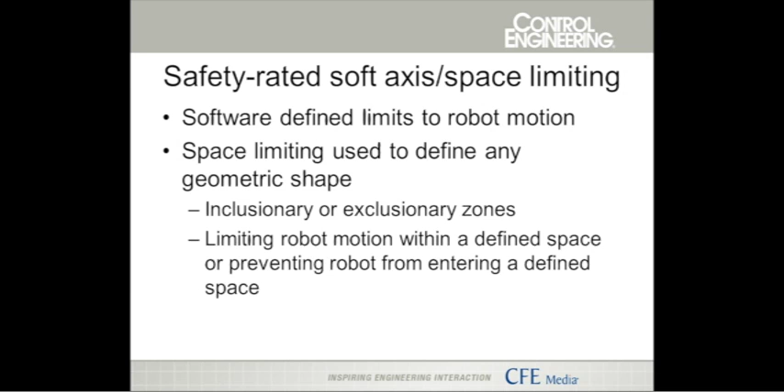Each of our major manufacturers have a different name for this particular feature. You have to ask if your robot is equipped with this feature of safety-rated soft axis and space limiting.

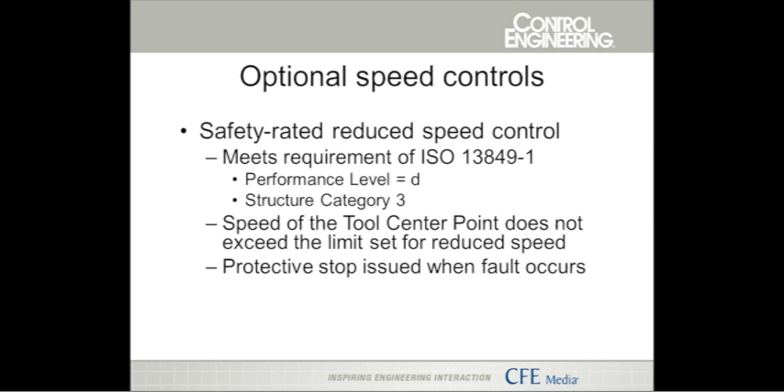The other enabling technologies are optional speed controls, where they are safety-rated. Specifically, use safety-rated reduced speed control. The safety rating meets the requirement of ISO standard 13849-1, specifically meeting a performance level equal to D and a structure category equal to 3. The speed of the tool center point, commonly called the TCP, does not exceed the limit set for reduced speed, and a protective stop is issued if a fault occurs.

We also have optional speed controls where we have a safety-rated monitored speed, again providing monitoring meeting a performance level D, structure category 3. The speed of the tool center point or of an individual axis shall be monitored, and a protective stop issued if the selected speed is exceeded. And then we have safety-rated monitored stop, which is essentially a speed equal to 0. The robot is monitored and will not move in this stop position.

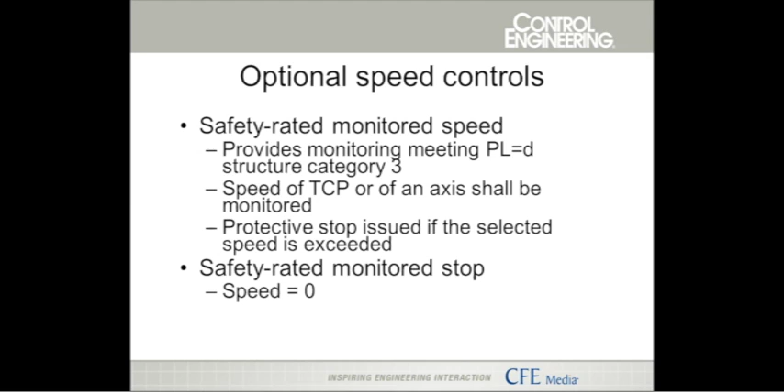We have identified several collaborative robot applications or methods of performing the application. The robot system exhibits certain control performance in safety-rated monitored stop or hand guiding. These features are very similar to traditional applications, only now we allow the human to work directly with the robot.

The safety requirements for these methods are well understood, and we are comfortable with the guidance provided for them. Two newer methods have been identified: speed and separation monitoring, and power and force limiting by design or control. Neither of these is well understood. Speed and separation monitoring - well, we can do speed control, that's more or less a no-brainer. But the separation monitor, determining whether you're keeping separation from a human or from a moving machine like a forklift, we don't have that sensing capability. The least understood of these is power and force limiting, either by design or control.

We are introducing a new ISO technical specification, 15066, which will provide additional information for collaborative applications.

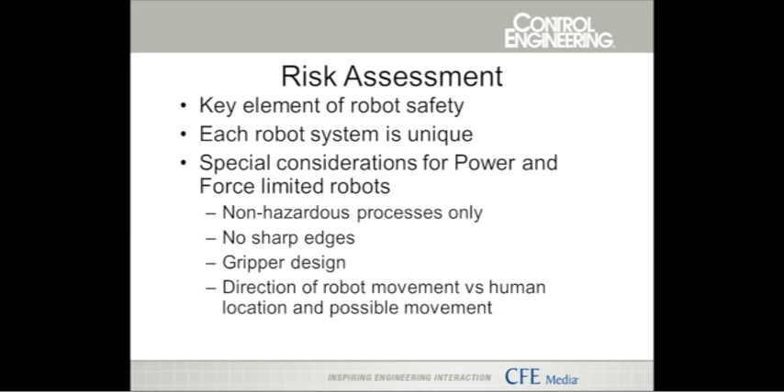Your comprehensive risk assessment has to be a task-based risk assessment. You need to look carefully at your layout design, the limits of the robot system, hazard identification, task identification, and hazard elimination and risk reduction. All of these are important features when looking at risk assessment.

There are a variety of task and hazard methodologies out there. The RIA has introduced a new technical report, TR R15.306, which presents a known task-based risk assessment methodology suitable for robotics. It's revised but similar to the method offered in the 1999 edition of R15.06.

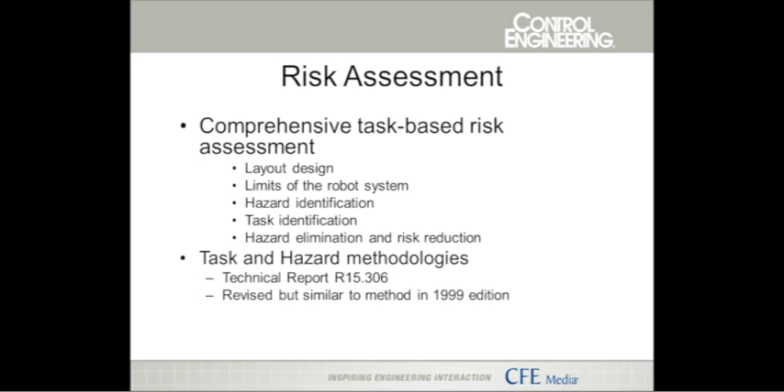Looking at workspace requirements, your collaborative workspace shall be clearly defined. This is where the operator and the robot can directly interact. Throughout the standard, we've been careful not to tell you to paint the floor, but this may be an instance where we want to tell you to paint the floor, so the operator knows exactly where he's standing relative to where the robot motion may take place.

You have to use a combination of safeguarding methods and protective devices to be in compliance with the robot performance features. Although we identify four specific methods of operation, we find in practice there are combinations of them and not one true method as we describe them.

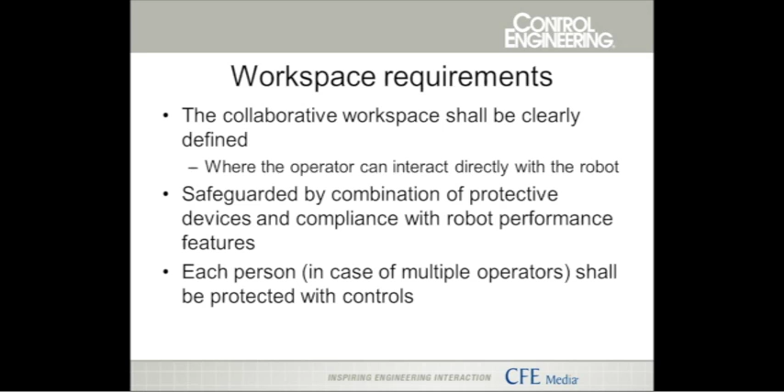If you have multiple people involved in an operation, each of them have to be protected with the necessary controls for a safe work environment. Your design of the workspace shall be such that the operator can easily perform all tasks. You want a clear area, not a messy, obstructed area.

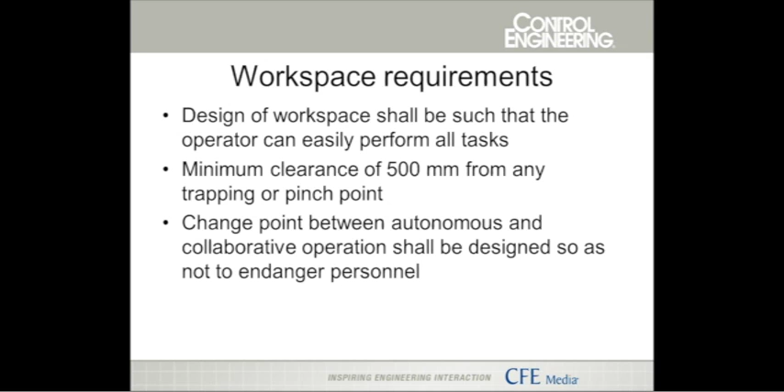There is a requirement for a minimum clearance of 500 millimeters from any trapping or pinch point. This is unique to collaborative robots. The change point between autonomous and collaborative operations shall be designed so as not to endanger personnel, and this goes to the layout of the cell. All of this must be carefully considered in your robot design.

One or more of the safety features shall be selected to ensure a safe work environment for all personnel exposed to potential hazards. Any detected failure of the selected safety features shall result in a protective stop. An autonomous operation requires a deliberate restart outside the collaborative workspace. These requirements in the standard are directed toward the integrator and apply to how he should design his collaborative application.

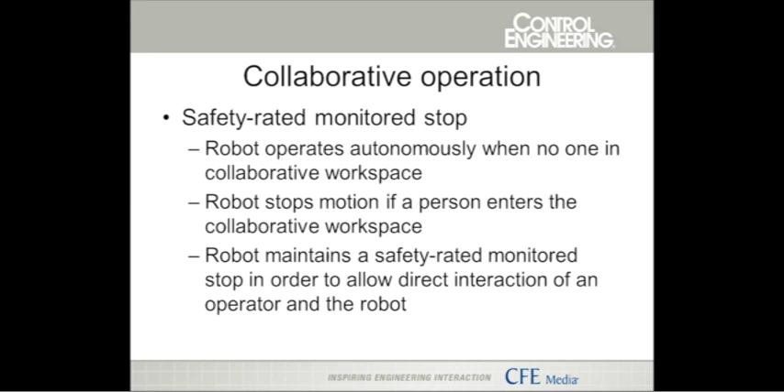If we look at the individual operations we've identified, we have the safety-rated monitored stop. This is where the robot operates autonomously when no one's in the collaborative workspace. The robot stops motion if a person enters the collaborative workspace. A robot maintains a safety-rated monitored stop in order to allow direct interaction of an operator and the robot. We found in practice that this feature is included in combination with most of the applications.

Another collaborative operation is hand guiding. A safety-rated monitored stop is issued when the robot reaches the handover position. The operator shall have a guiding device to move the robot to the intended position, and shall have clear visibility of the entire collaborative workspace. Again, very important - in collaborative operation, you want the operator to be able to see what's going on in the entire area. When the guiding device is released, a safety-rated monitored stop is issued.

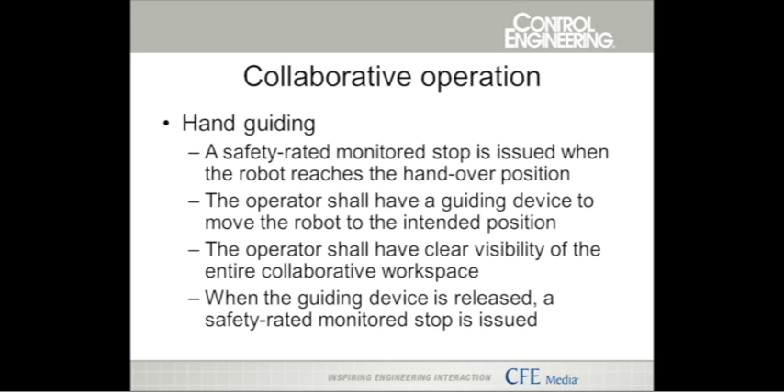The third, speed and separation monitoring, is relatively new. The system is designed to maintain a safe separation between the operator and the robot in a dynamic manner. I sometimes call this dancing with the robot. If you're dancing with a forklift, well, we probably don't care. But if the robot is dancing with a human, we care.

But that's where we don't have the sensing capabilities. We have several organizations, both in the U.S. and Europe, looking into sensor technology to see if they can improve on the ability to detect the difference between a human and an inanimate object in the workspace. You use the risk assessment to determine what the minimum separation distance should be.

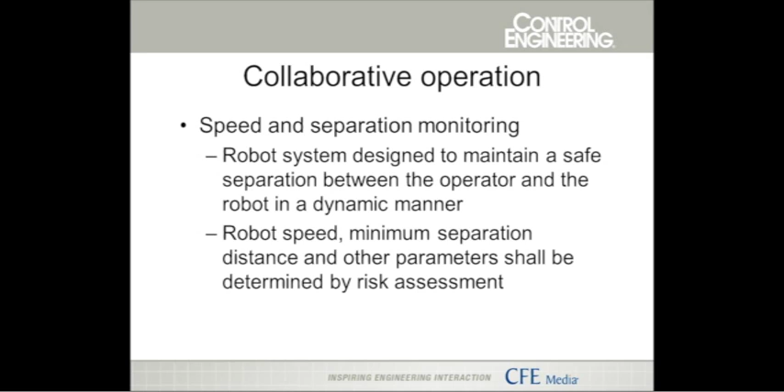And then finally, our power and force limiting by design or control. This is where the robot can interface directly with a person, can touch a person. I would say strike a person, but I don't want to give that impression. To a point where the human will not be injured. The robot cannot apply enough power or force and hurt the human.

This originally was going to be direction to the robot manufacturers, kind of turning the big bad 6-axis articulated robots into WIMPs. However, we found that was impractical. If you made them weak enough that they couldn't hurt a human, they also weren't strong enough to perform any work. So the direction we give now is to the integrator in his design of the collaborative robot, where the robot, when it is free to strike someone, will not strike them with sufficient force to cause harm, but when it's ready to do the work, it has enough power to do the work.

Hence our discussion about grippers and the fact that you don't want finger pinch points with a gripper.

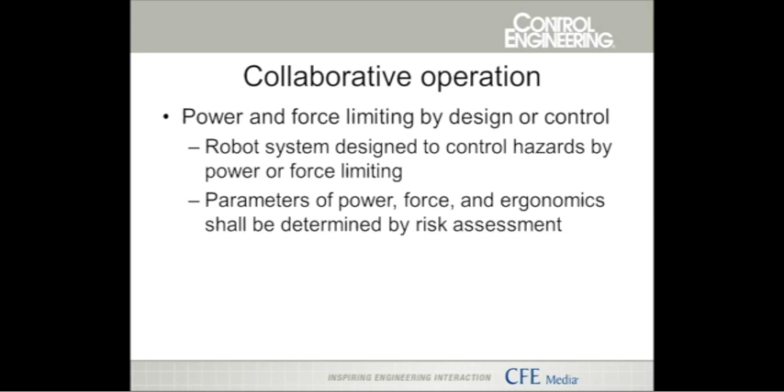The new ISO Technical Specification 15066 will contain additional information and guidance on collaborative robot application. I just returned from our most recent meeting in Japan, where we approved the publication of the document. It has now been forwarded to the ISO Central Secretariat in Geneva, Switzerland, for their production and publication of the document. I have been promising this document for months and months. It is now only a matter of months away, but it is totally out of our hands, and we do not know how long it will take for the published document to be available to the public.

Biggest item you're going to find in this new technical specification is the results of a study that we commissioned with the University of Mainz in Germany. And that study was basically the onset of pain. We have lots of data, particularly from the auto industry, telling us how much pressure will break a bone, how much pressure will cut the skin. But these are injuries, and we cannot allow injuries.

When we write a standard that says it is okay to work with a machine, that means that the worker comes to work in a healthy condition, he goes home in a healthy condition. We can't expose him to a hazard of being injured. So the approach we're taking is maximum injury at a failure would be a bruise or a contusion.

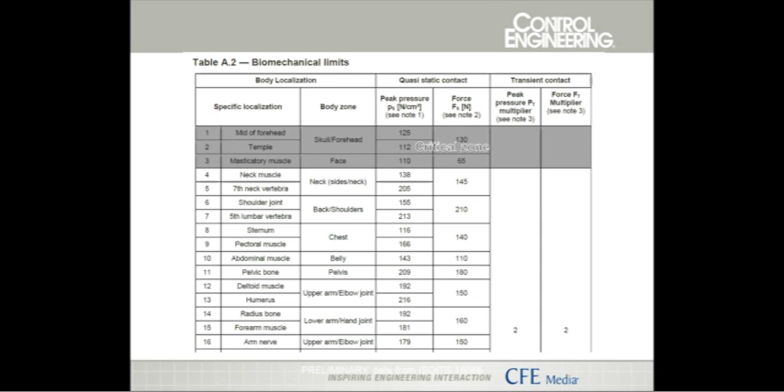So, with this information, we hope to have very successful collaborative robot applications in the future. I thank you again for your attention.

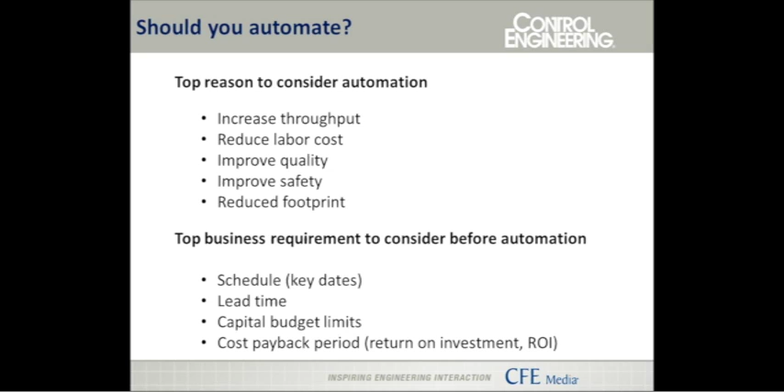Once we've identified the top reasons and business requirements for a project, we also need to understand the system attributes and which ones are important to us on our manufacturing floor and for our particular organization.

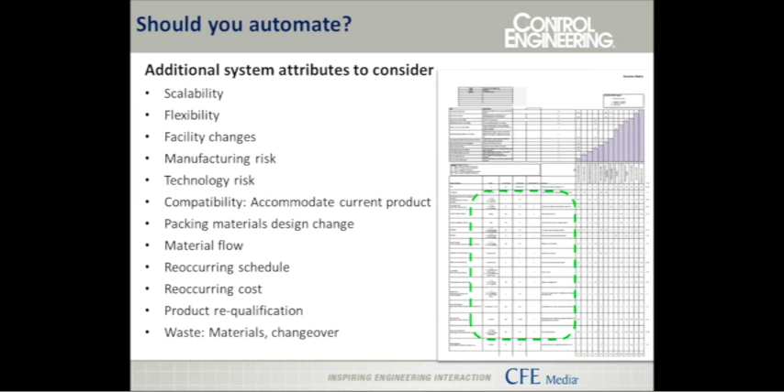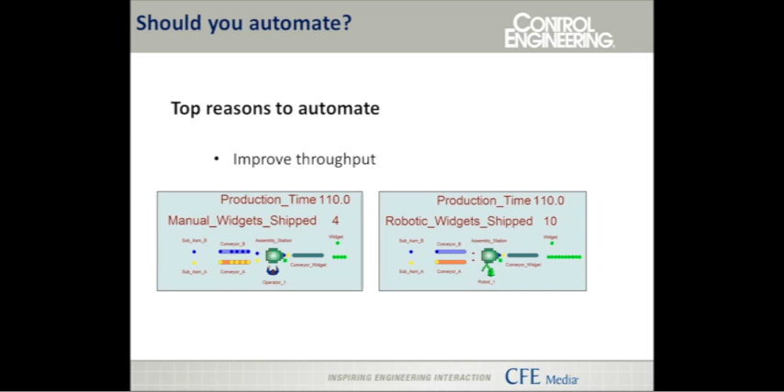So let's touch on some of the top reasons that we should automate. There's improved throughput. We know robots can move a lot faster than people, but do you really have the demand for that higher throughput? If we make more, is somebody going to buy that from us? So you need to understand the current baseline of your process, and whether there are upstream and downstream processes bottlenecking the operations. We need to focus on optimizing where you need to be, looking at material flows, buffer sizes, station utilization, throughput, and so on.

Another reason that we hear all the time is we want to reduce direct labor costs. So we know that machines can replace direct labor, but sometimes it has other implications in our manufacturing process. So you need to make sure that you're considering all of these costs. Sometimes we add automation, but it requires us to hire additional engineers, technologists, maintenance people to support and operate the equipment.

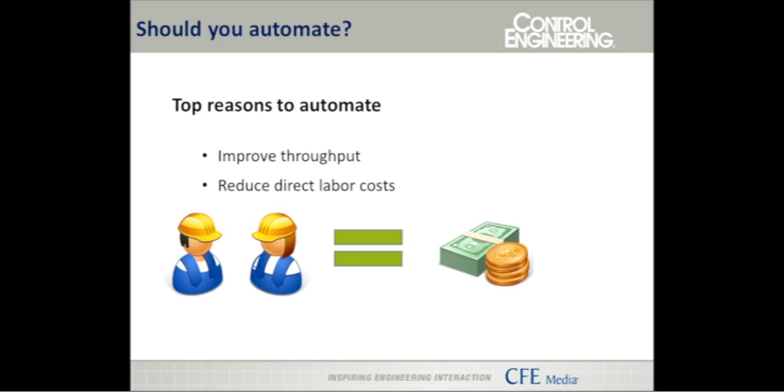We also need to make sure we understand all of the operators' operations on the plant floor so that as we implement the automation, we're having it do a one-for-one replacement of those tasks. Another reason for automating is to improve quality. Are your parts and components going to achieve the same level of quality when you automate? And then how are you going to check them to make sure that you are, in fact, meeting those quality requirements?

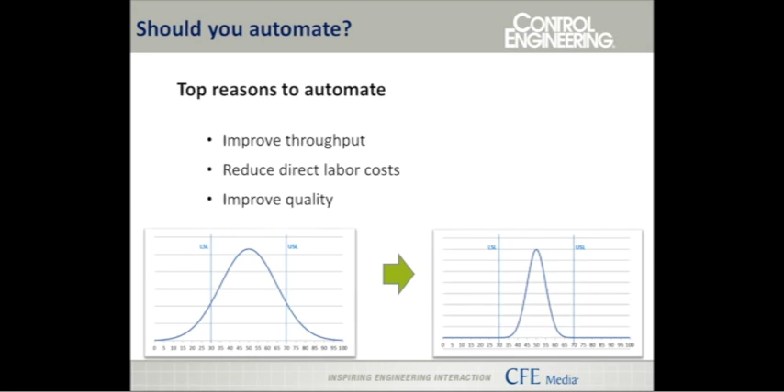So improving safety is a big factor for automation, and Jeff talked a lot about the requirements for that. Safety, as we look at developing systems for customers, is always a big consideration, whether it's with traditional industrial robots or the introduction of collaborative robots in the manufacturing space. So robots can perform a lot of dangerous tasks, ergonomically challenging tasks, but we always have to quantify the cost benefit of the required safety improvements to warrant the actual project.

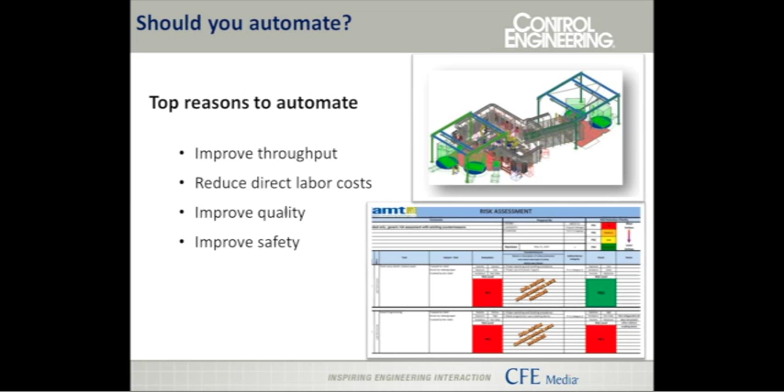The introduction of collaborative robots opens a lot of new possibilities for new applications, but I can't stress enough that we need to focus on the fundamental safety concerns for automation, even when employing the collaborative robots. Another consideration for automating is footprint. How can we do more with the floor space that we have available? As we look at automation projects, sometimes this can be a little bit misleading. There are cases by putting automated systems in that you reduce the footprint, but there are other implications where perhaps you have to grow the area for safety fencing, for staging material, for delivery, and things of that nature.

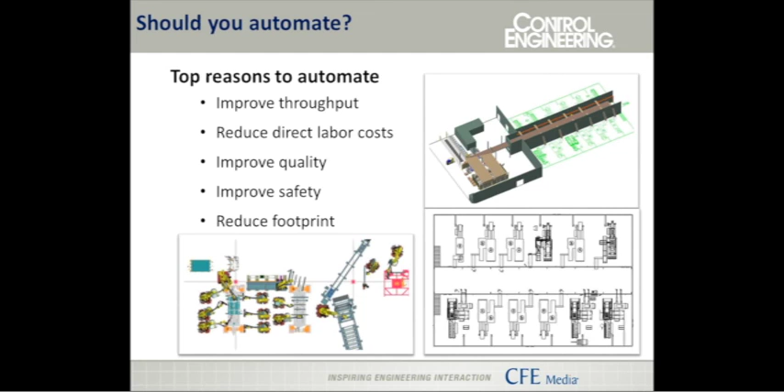We talked about some of the reasons for automating. Just to touch on a few of what we consider to be the bad reasons. First is trade shows. I can't tell you how many times I've gone to a plant and the engineer says, my boss just got back from a trade show and he saw these new collaborative robots and told me to get one in here. So the motivation is the new shiny object as opposed to let's go out and figure out where we can employ automation to really solve a problem for us. Another reason is they hear their competition is automating and really don't understand why that competitor is automating, if they truly justify that or if they're trying to solve a problem.

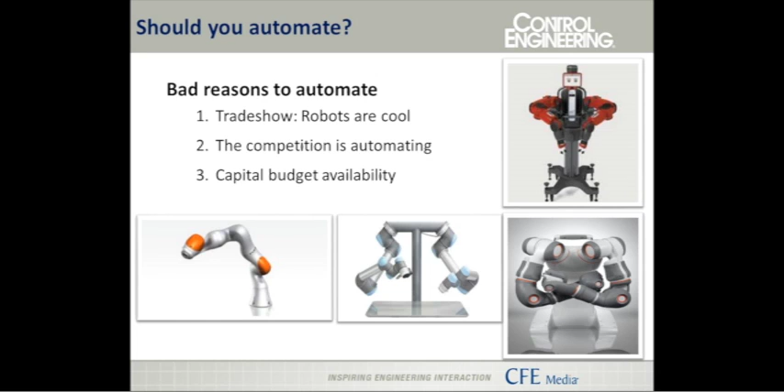And then this time of year, the end of the year, very often there's capital budget available. It's the end of the year, there's money out there, and somebody says, hey, go out and spend this money or we're going to lose it. So they go out and make a big push for an automated system without having really thought through how that will be used in the plant and justifying that purchase. Let's move on. We'll talk a little bit about business requirements of any typical automation project.

First, we have schedule requirements. We need to know, can we meet the production milestones and part volumes to match our startup dates that we have? We all want the shortest schedule, the highest quality, and the lowest cost. It's very difficult to do all three, so pick two and focus on those is our recommendation. There's lead times to be considered. Many times the lead time of a single major component in the system is going to drive your overall schedule, regardless of what your scheduling requirements are. Make sure you understand what those are before setting up the overall schedule for your project.

And there are certainly capital budget limits. So you really need to have very open and frank discussion within the organization. Understand what your budget limitations are, what the ROI metrics are, and understand what happens if you go over budget. Are there additional funds available, and how is that going to be received by the organization? Next are the ROI requirements. This is an area that you really need to spend some time and understand from the management of the company through the financial areas. What are the requirements for ROI? Have it clearly defined, understand what your payback periods are, your primary goals.

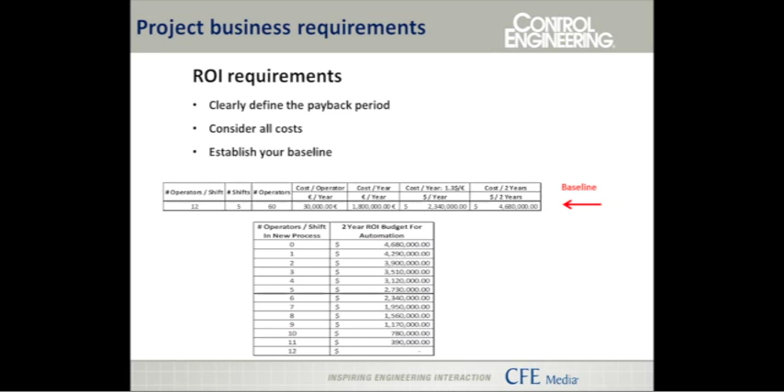You can start by establishing some of the assumptions of how many shifts you're going to work, how much it costs per year for each of the operators, and so on. Consider all of the costs by defining the labor trade-offs, some of the facility changes, and everything else that you need for a successful automation project. Once you've done that, you can calculate the available dollars you have to spend on the project and make sure that your expectations fall within your budget constraints.

So let's move on to your process. It's always surprising to me how many companies don't really have a good handle on their manufacturing process. You go out on the floor, you start talking to operators and looking at posted standard operating procedures and find out that there's a big disconnect.

So it's important to really do a good analysis of the information and the operations on the floor and make sure that's getting back to the team that's defining the automation project. Make sure you're not missing any important steps in the manufacturing process.

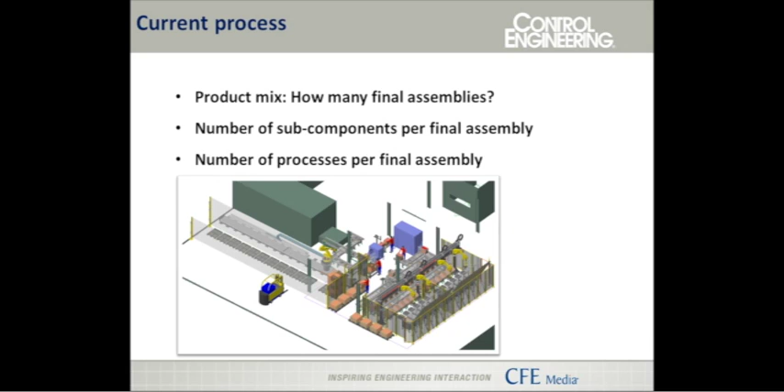So what's important about your process? Really you have to start with the product mix that you have. How many components go into making a product, the complexity of that, and how well you can automate it.

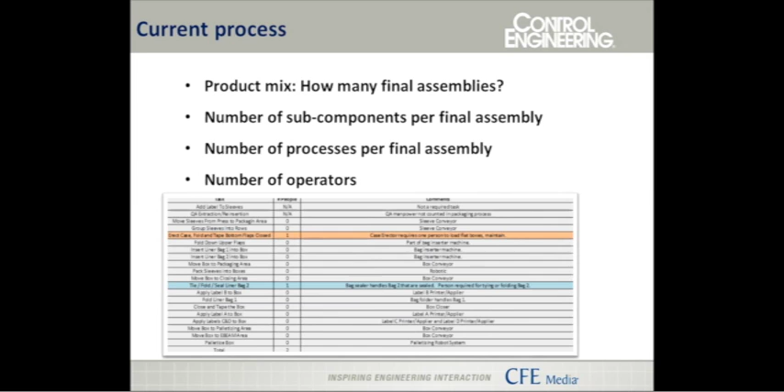The other thing that we need to consider is the number of operators. It's important to know what effect automating is going to have on the current operators on the shop floor, whether they're interacting with the automation, if they're being displaced by the automation, and what effect that has on production, as well as the personnel that are left on the shop floor producing the product.

What type of equipment do you have now? You may have a sophisticated machining line with machining centers that are being loaded and unloaded by operators. If we look at loading the machines with the robot, we also have to look at how is the part being presented to the robot.

What type of dunnage is going to be required to position those parts for robotic interfacing. Where will it be? How are parts oriented? What type of tolerances do we have to deal with? We might even get into the point of needing additional vision systems to help guide the robots. So you need to really take a good look at what you have today and what you anticipate that process to look like.

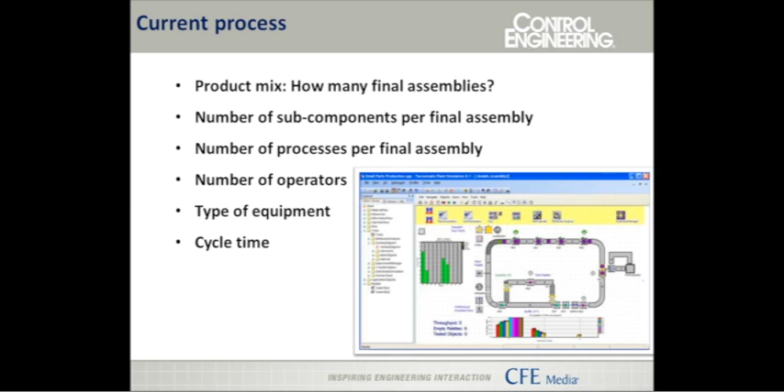Cycle time. We need to understand what our current cycle times are, and that helps us estimate the feasibility for future requirements and allows us to better understand current variation, and that could be a very powerful tool for us.

And then there's system throughput. We need to know what the current throughput is, what the anticipated throughput is by employing the automation. But it's also very important to understand bottlenecks in the current operation and what impact those are going to have by automating. You need to really understand all these variables that drive the variation and downtime in the system as well.

And there's quality. We need to understand, even if it's not our primary motivation in automating to improve quality, we certainly need to understand the impact of the automation on quality of the product. Need to set some targets for that, some expectation, what type of variation is permissible, what type of scrap and rework you're expecting. So it's important to consider that and include that in part of any automated system in terms of specifying those requirements.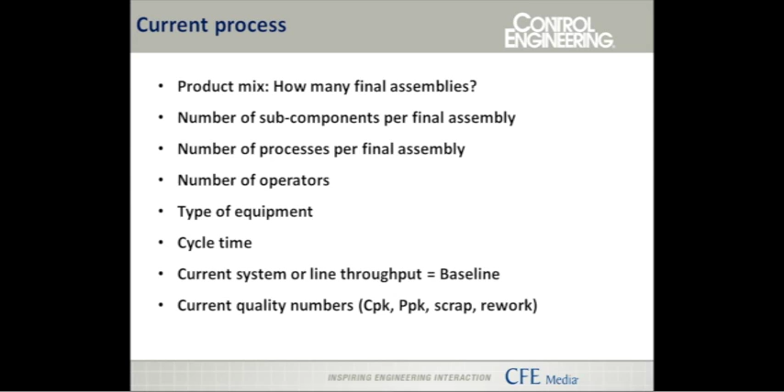And again, there's the footprint. We need to have a handle on what are the trade-offs between automating operations and the plant floor space, whether it's going to take more space, less space, the considerations for material flow, dunnage, so on and so forth.

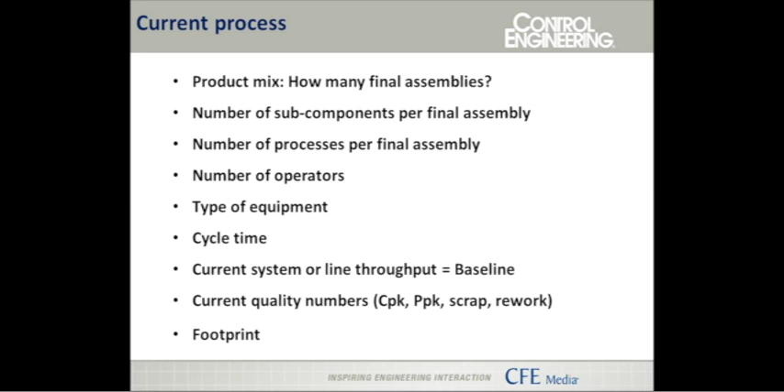Now it's important that we talk about the appropriate level of automation. Many types of applications have been automated for many years. The bugs have been worked out, and there's really off-the-shelf solutions that are readily available from a variety of different suppliers. In these cases, you can find suppliers that specialize in a solution and get very competitive offerings.

I think Jeff may have mentioned welding earlier. There's certain welding applications that are very sophisticated but very well developed. So leverage the expertise that's out in the industry and don't go out and try to reinvent the wheel for sure.

Now the introduction of collaborative robots really starts to open up a lot of new possibilities to rethink current operations, expand levels of automation, and approach new projects that you may not have considered because of the sophistication and safety considerations with traditional industrial robots.

So automation is a long-term investment, and based on it, we've answered some of the questions, including process, assemblies, and part volumes. It's going to determine the required level of automation and the types of robots that you might use. If you're in a process that is high speed, high volume, precision tolerances, and low product mix, you may be looking at fixed automation or maybe traditional industrial robots. In many cases, we find automated lines have a mix of both of those.

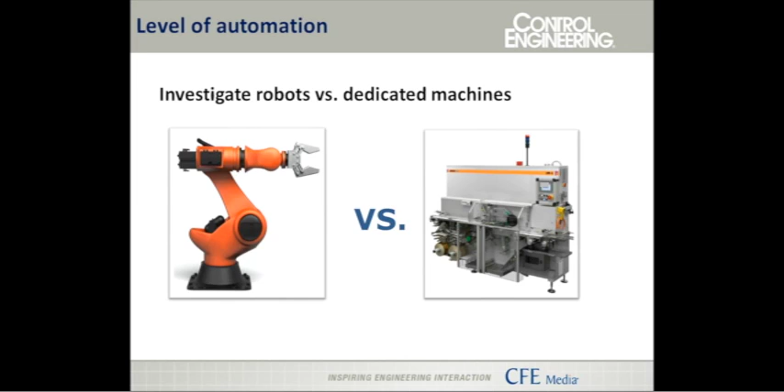How are you going to move product around the plant or within the system? You're going to be looking at your footprint, the material flow for incoming material, work in process, outbound product. You might have a small footprint and a small budget, and conveyors will likely be a better option for you than AGVs for moving material around, for example.

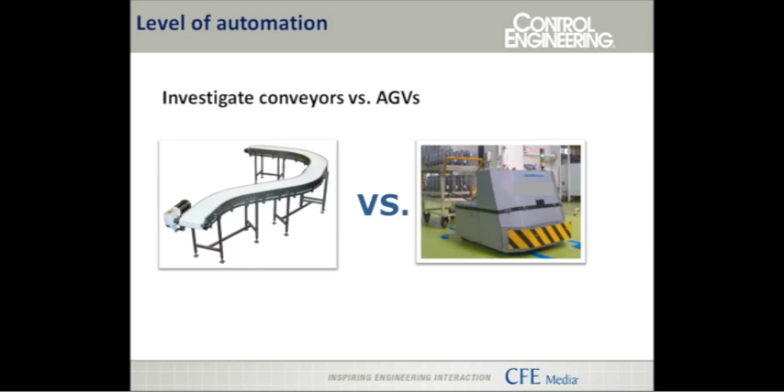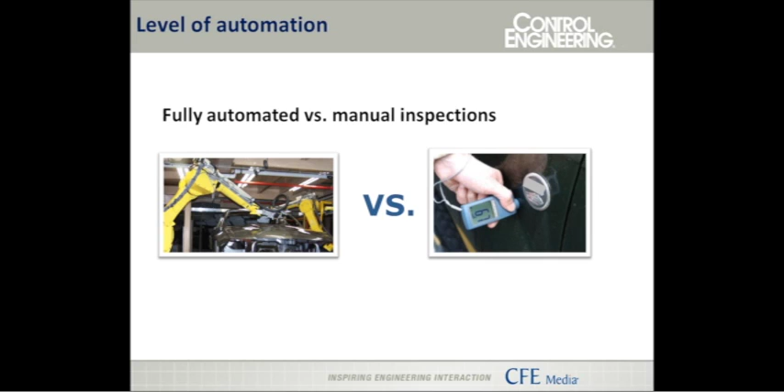Inspections can be pretty difficult to automate. Quantitative inspections certainly lend themselves to automation more than qualitative. But in any case, you really want to quantify the inspection process, know what the specs are, and what level of automation you need for that inspection with these robotic systems.

And after reviewing the level of robotic automation that's appropriate, you really need to decide whether you as a company are ready to self-integrate, or if you'll go outside to an integrator or an automation partner. You need to consider the capabilities, time and resources, your application experience, and safety design liabilities. The best automation solution should always embrace and make use of your in-house expertise and not ignore or replace what you have in-house. Certainly nobody knows your process better than you do.

So when you're going outside seeking automation help, we certainly recommend that you find a company that appreciates and respects your in-house knowledge. It really wants you to be a part of whatever solution that we put together.

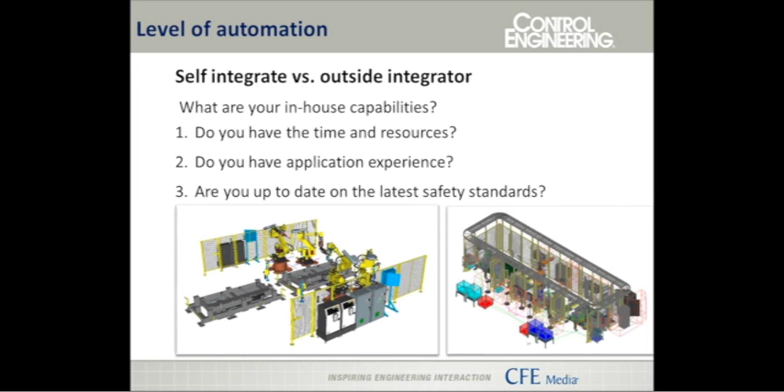If you do decide to go outside for automation help, look for an integrator that has your best interest in mind, not one that's simply pushing a product or a solution that might not suit your specific needs. Find a partner who's going to work alongside of you, lead when expected, but always lets the facts speak for themselves in terms of driving the automation solution for your company.

So there are multiple ways to solve most manufacturing problems, but there's only one best way to solve a problem, although we find there are many acceptable ways to solve the same problem. When it comes to making your final decision, the options you consider should be the result of a structured, empirical approach that's removed the guesswork out of what you can expect from your automation project.

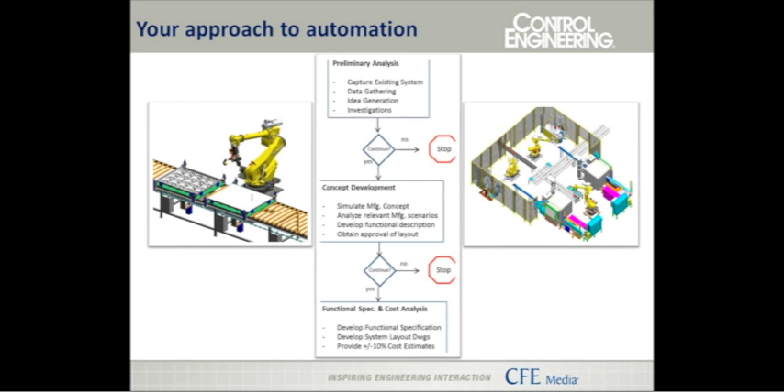So conceiving, designing, and implementing custom automation or robotic solutions, it's a science. It requires skill level and a multitude of disciplines. So it begins with gathering the right data, following a structured analysis, and presenting multiple fact-based solutions before making your decision. So set targets for your automation and take into consideration the system attributes, the metrics, and if you have an existing system, use that as a baseline for establishing these new targets.

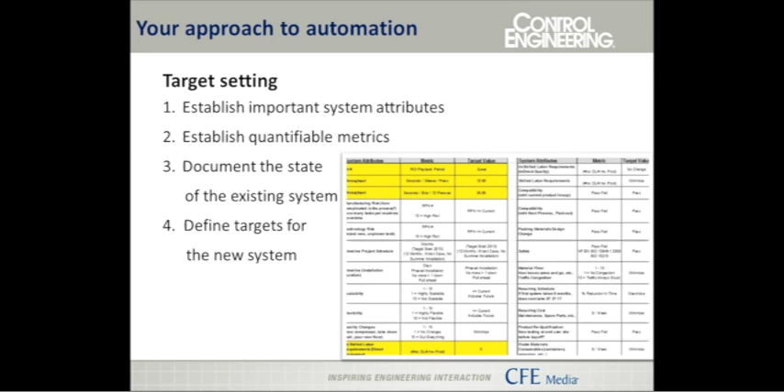So now if we made it this far through the analysis and definition of an automation project, we're assuming you have the correct team in place with the right talent. You want to take it to the next level and really get into more engineered ideas. So at this point, you develop relevant simulation concepts based on actual sequences, throughput, and floor space, put together a functional spec, layouts, cost estimates, and you're on your way to defining and implementing a correctly engineered robotic solution for your company.